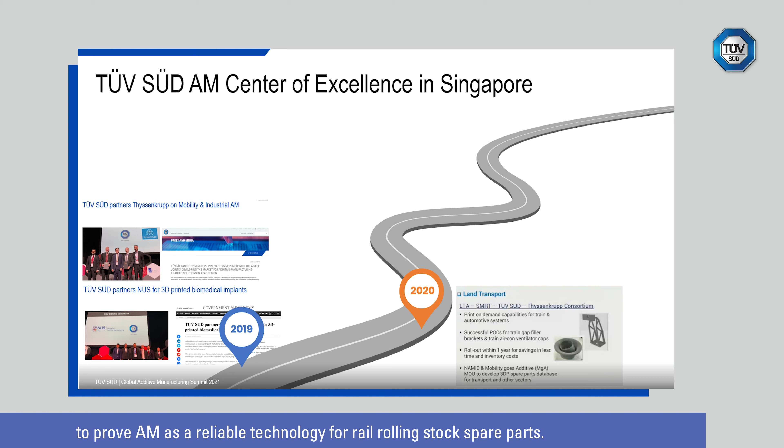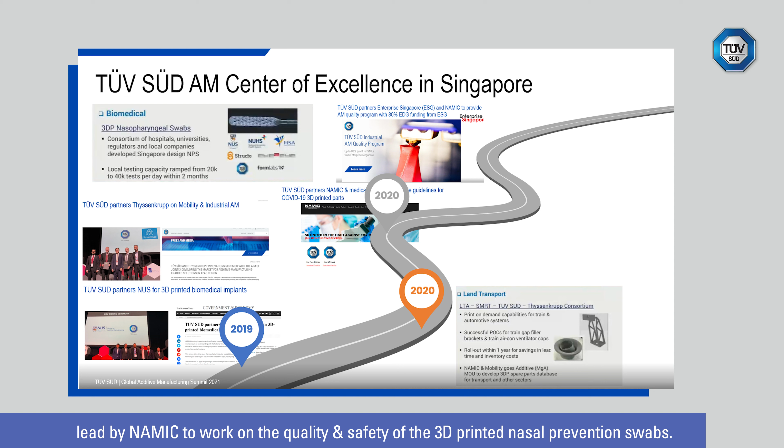During the pandemic last year, we were proud to be part of the Singapore AM ecosystem led by NAMIC, working on the quality and safety of 3D printed nasopharyngeal swabs. To support SMEs and service bureaus to expand market share, we work with Enterprise Singapore to provide an 80% funded program to achieve industrial-grade AM manufacturer certification.

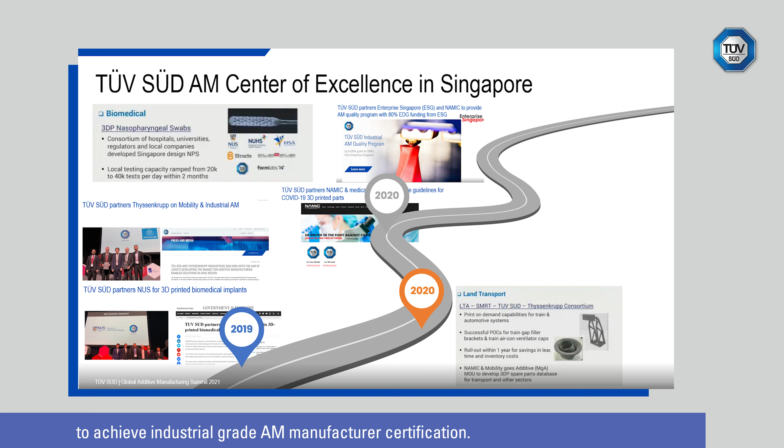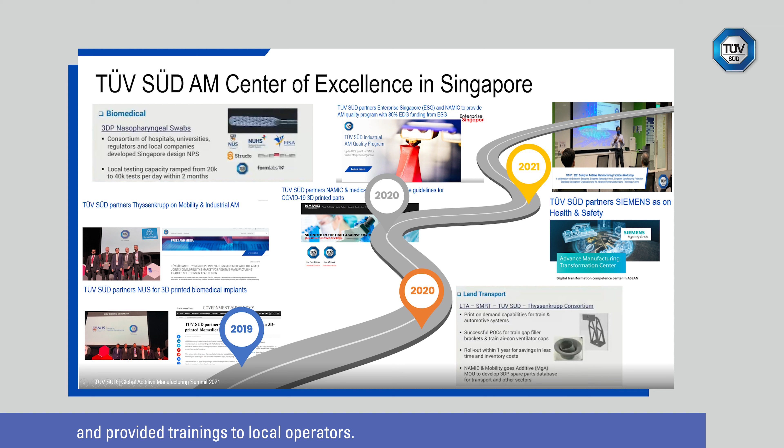For safety of operators working in metal AM facilities, we contributed to ESG's technical reference TR87 and provided training to local operators. We also formed a partnership with Siemens AMTC with the aim to roll out health and safety training for all qualified personnel and professional engineers in the Asia-Pacific region, and many more.

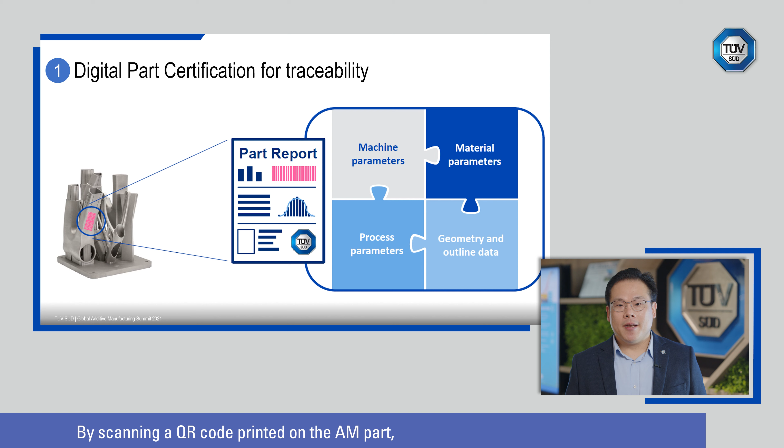Moving forward, we have 3 R&D areas that we welcome like-minded partners like you to join us. First, digital part certification for traceability. By scanning a QR code printed on the AM part, key manufacturing process history audited and verified by TÜV SÜD will be available, enabling full traceability and a step towards digital twin concepts for Industry 4.0.

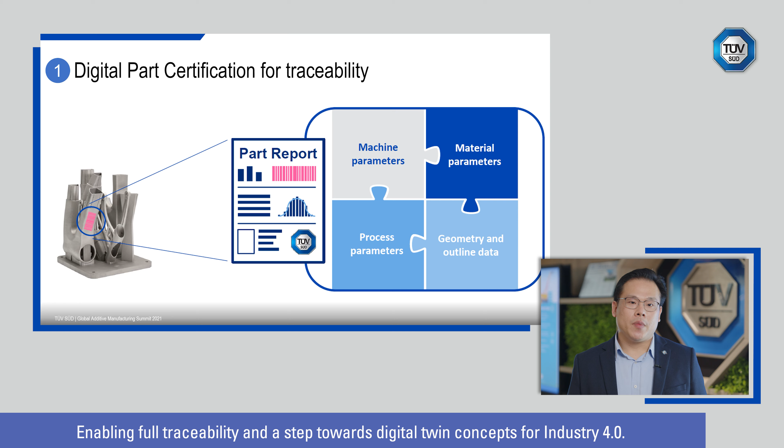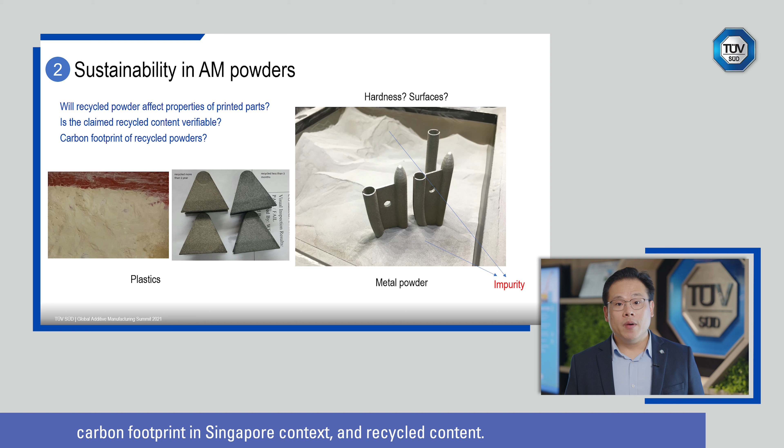Second, sustainability in AM powders. You have seen the MOU with Molyworks earlier this morning. Together with Molyworks, we will study the circularity of AM powders, carbon footprint in the Singapore context, and recycled content. Third, AM-specific quality management system.

The newly released ASTM 52920 is an essential step towards industrial-grade, high-quality AM production. We will continue to provide the industry with this capability. Please reach out to us if you are interested in any of these activities.

Next, my colleagues will be elaborating more on 2 topics close to our hearts: quality and safety.

My name is Dan Qing. TÜV SÜD is a testing and certification body. Our neutral and independent assessments enable manufacturers to build capabilities and gain trust from end users. Specifically for AM, we build in our AM expertise in quality, safety, as well as sustainability topics.

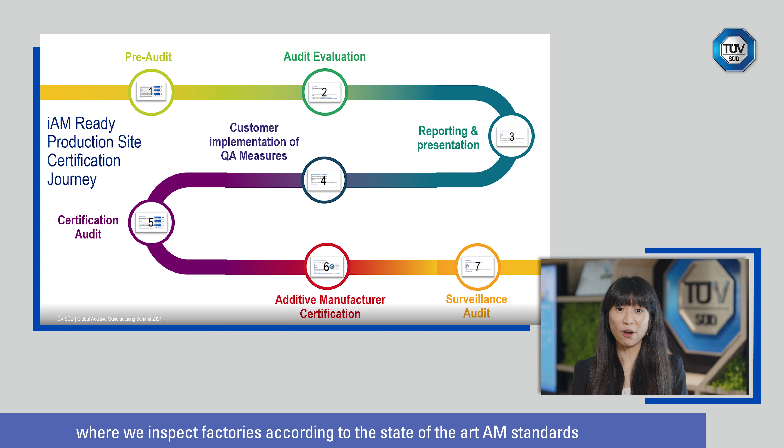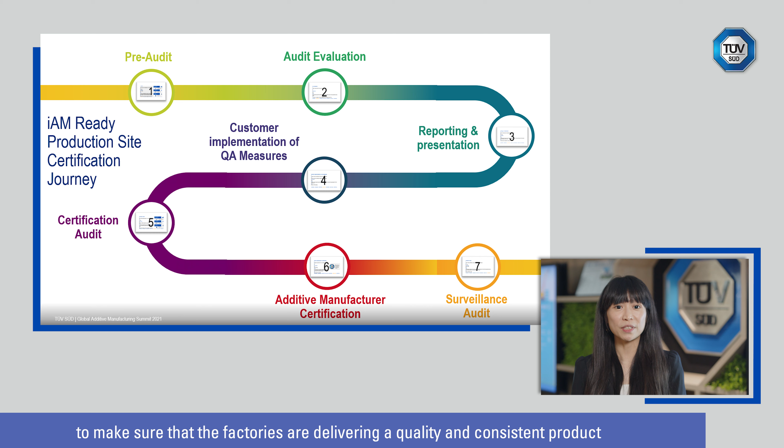For quality, TÜV SÜD established a certification scheme on AM quality assurance, the iAM Ready certification, since 2017, where we inspect factories according to state-of-the-art AM standards such as DIN SPEC 17071 and ASTM 52920, to make sure factories are delivering a quality, consistent product with good traceability.

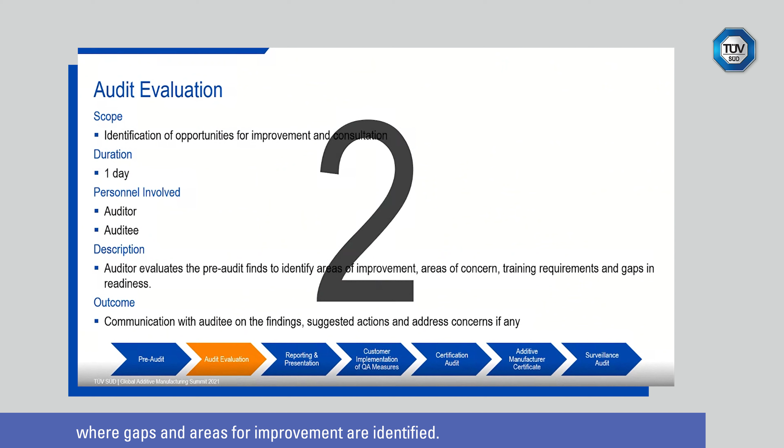What does a typical certification journey for AM with TÜV SÜD look like? It includes the pre-audit, where we conduct document review and on-site assessment, followed by the audit evaluation, where gaps and areas for improvement are identified.

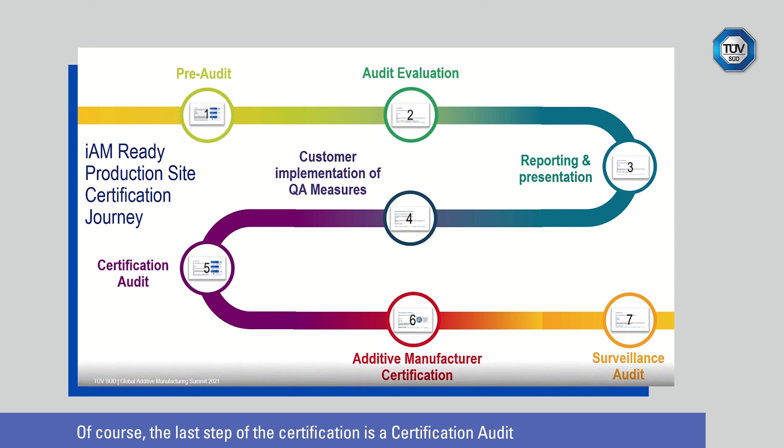This is followed by reporting and implementation of improvements for gaps identified. Of course, the last step of the certification is the certification audit, where we assess whether the organization is conforming to the certification requirements. To maintain validity, a surveillance audit is conducted once a year after that.

We help customers establish test plans and conduct testing of AM products, taking into consideration technology use, functionality, and safety aspects. We have services to qualify raw material properties, as well as, in some cases, reused material properties, to ensure the quality of the final products.

Thirdly, we work with AM powder makers globally to ensure AM powder sustainability and quality, creating environmental benefits for the additive manufacturing ecosystem in Singapore.

Ladies and gentlemen, welcome to TÜV SÜD Additive Manufacturing. My name is Balu. Because of the inherent design freedom and ease of fabrication AM offers, more technology adopters are coming to the additive manufacturing space.

Even though AM has the capability to manufacture almost anything, from small plastic gadgets such as keychains, mementos, and spectacle frames, all the way to fully functional metal parts like implants, turbine blades, or even 3D printed rocket engines, the growth is more pronounced in the metal AM sector.

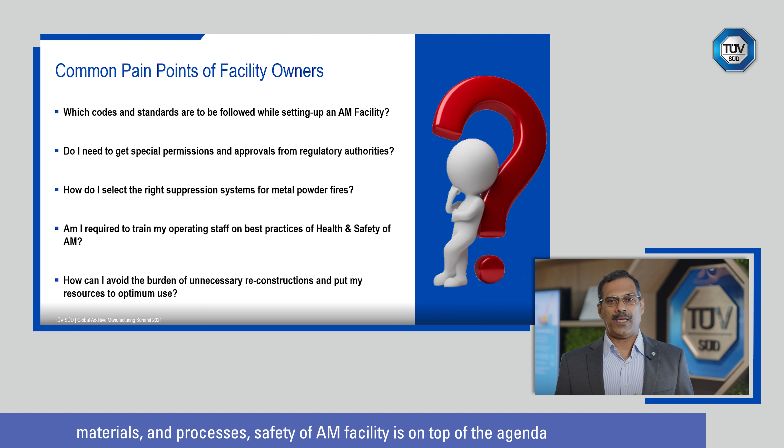As a result of this growth, more and more AM facilities are being built globally. But this growth also brings the issue of additive manufacturing safety. As the technology utilizes potentially hazardous hardware, materials, and processes, safety of AM facilities is top of the agenda for many stakeholders, including OEMs, facility owners, and even insurance companies underwriting these facilities.

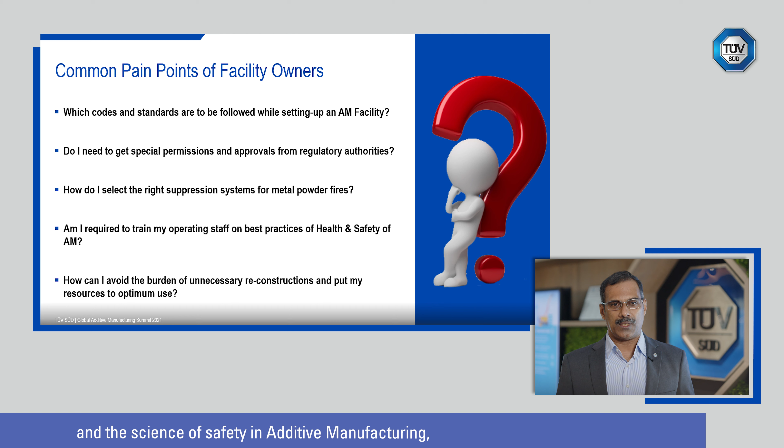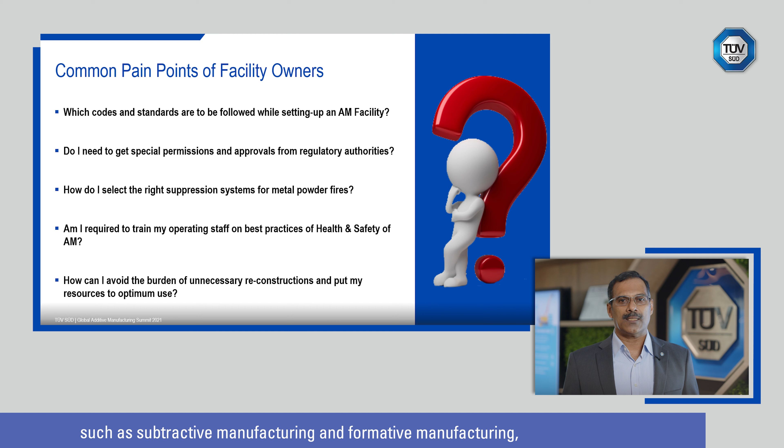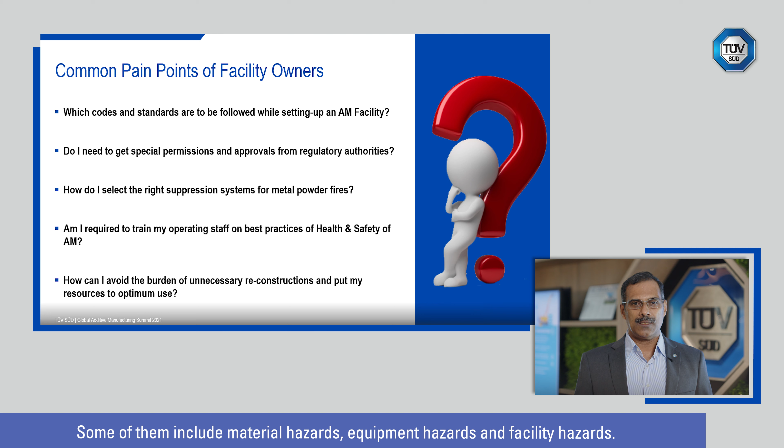Due to the lag between technological developments and the science of safety in additive manufacturing, you need to make sure the new facility is safe to use before commencing operations. Unlike traditional manufacturing counterparts such as subtractive and formative manufacturing, additive manufacturing has distinctive hazards and risks associated with it, including material hazards, equipment hazards, and facility hazards.

AM requires substantial investment in terms of machines, materials, and manpower. A typical single powder bed fusion machine setup will easily offset more than $1 million, and no one in their right mind would have such an investment wiped out just because of ignorance or carelessness.

Having seen the hazards and risks, the next question is how we can bring safety into AM facilities. The short answer is by integrating the islands of expert knowledge available today. It involves combining the expertise of important stakeholders such as AM equipment manufacturers, material developers, user communities, research and development institutions.

Regulatory authorities, safety certification companies, standards organizations, and so on convert that expert knowledge into a set of guidelines and actionable practices. Create a safety program based on those guidelines and regulatory requirements. TÜV SÜD has developed health and safety certification of AM production sites to meet these demanding requirements.

Health and safety certification of AM production sites. TÜV SÜD Singapore has certified Digital Cantech Company Limited Taiwan for health and safety in additive manufacturing. Fully developed by Singapore's Centre of Excellence, the certification scheme centers around PPP 10998:2021. This TÜV SÜD normative reference defines the HSE requirements of additive manufacturing production sites that employ powder-based AM technologies for printing of parts.